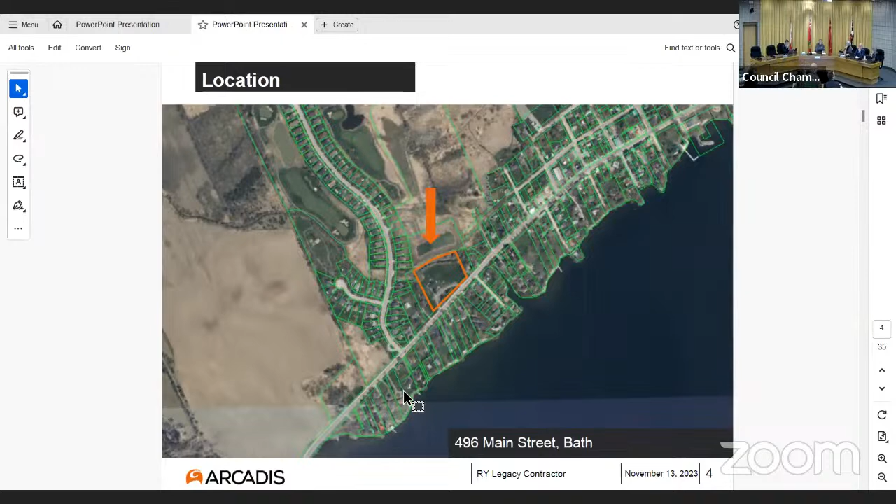This is the aerial imagery of the parcel we're referring to, 496 Main Street, Bath, in the Village of Bath. To the north is Bath Creek and Loyalist Golf and Country Club. To the east is the Village of Bath, various commercial uses, and low density residential uses. To the south are low density residential uses, Main Street, Bath, and further south is Lake Ontario. Immediately west is low density residential development along Country Club Lane and lands designated for aggregate.

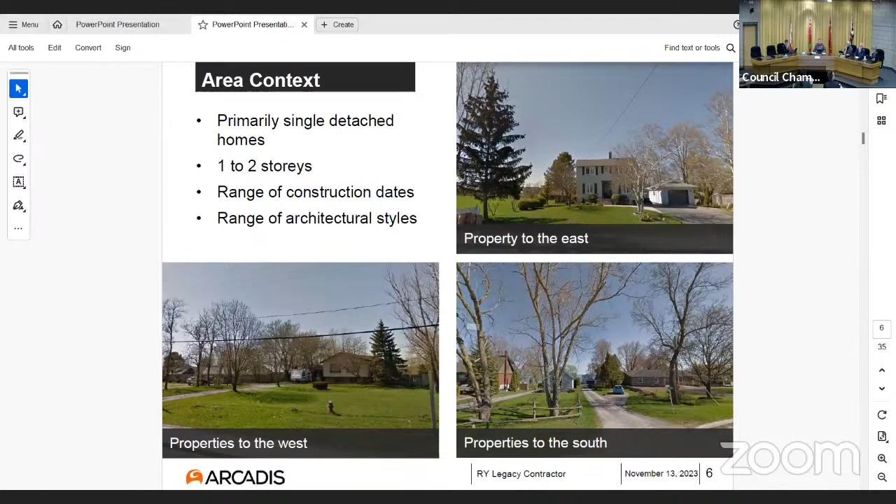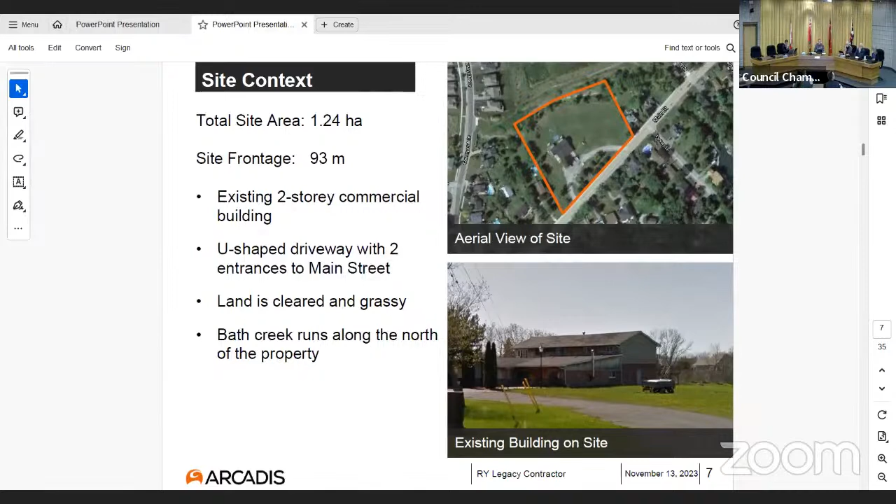So here's the proposal broken out into land use blocks: 10 residential blocks, blocks 1 to 9 for semi-detached residential uses, and block 10 for a single detached residential use. There's a central cul-de-sac, and then the lands adjacent to Bath Creek are proposed to be open space and environmental protection. Overall density...

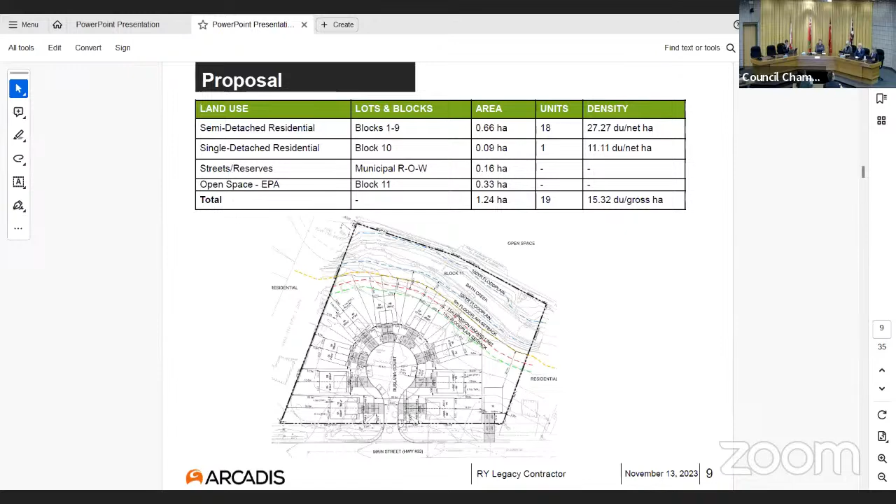I'll just jump in. So there's the picture of the cul-de-sac. Apologies, it's quite small when seen on this screen, but the semi-detached dwellings front around the central cul-de-sac, and then the single detached houses are to the east.

So in 2021, we undertook the public open house and statutory public meeting. We heard comments related to concerns with compatibility and scale, concerns with potential traffic impacts, concerns with servicing availability, concerns about open space, and concerns with stormwater management.

So based on this, we've been working to update the plan. The key updates include changing the townhouse block to a single detached block. That block to the east was originally proposed to be a townhouse dwelling with 4 units. It's been reduced to a single detached block to help with the transition from primarily single detached in the Village of Bath to the semi-detached along the cul-de-sac.

We've increased the length of driveways to accommodate more parking. That was a concern we heard from members of the public, so we increased the length of driveways so each driveway can accommodate 4 cars as well as 2-car parking available in the garages. We've undertaken updated engineering studies to address township comments from the technical review and undertook a compatibility study to address proximity to the quarry.

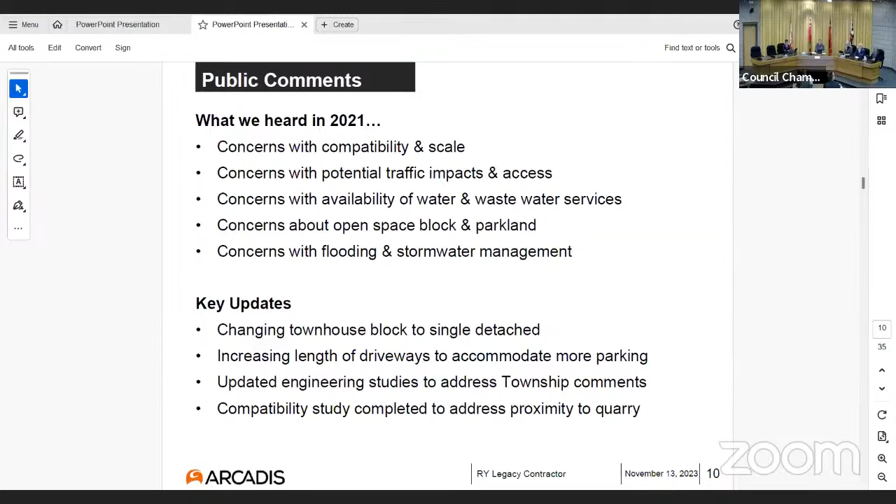So again, here's the proposed plan of subdivision, and we'll go through some of the design considerations. We're looking to provide a mix of housing types in Bath, so semi-detached as well as single detached, maintaining a 6-meter floodplain setback for the property lines and a 15-meter floodplain setback for the buildings.

We're looking to minimize the number of entrances to Main Street, so we didn't increase the number of entrances. There's still 2 proposed, one with the cul-de-sac and one for the single detached driveway. And again, increasing the number of parking spaces to over 2 per unit, just to help address concerns related to possible visitor parking.

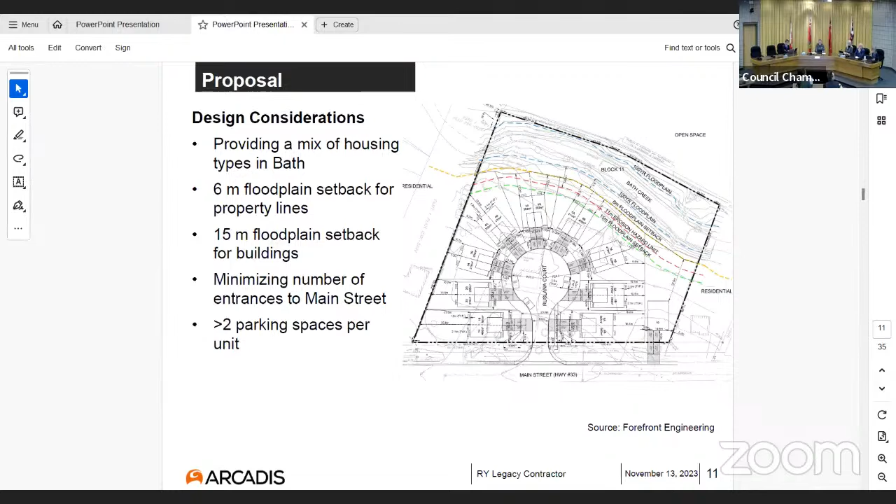So the proposal is for the subdivision to be serviced by municipal water and sanitary services. Loyalist has confirmed there is sufficient infill capacity, and the servicing report provided with the application updates and addresses any local concerns. Block 11, the lands associated with Bath Creek, is proposed to be environmental protection, and the owner will be providing cash in lieu of parkland, as Block 11 was determined not to be suitable for park and open space.

Access is via a public cul-de-sac connecting to Main Street. Each single detached dwelling and semi-detached dwellings have individual driveways. The semis have individual driveways connecting to the cul-de-sac, but centralized to one street connecting to Main Street. And there are sidewalk connections that connect to the existing sidewalk network on Main Street.

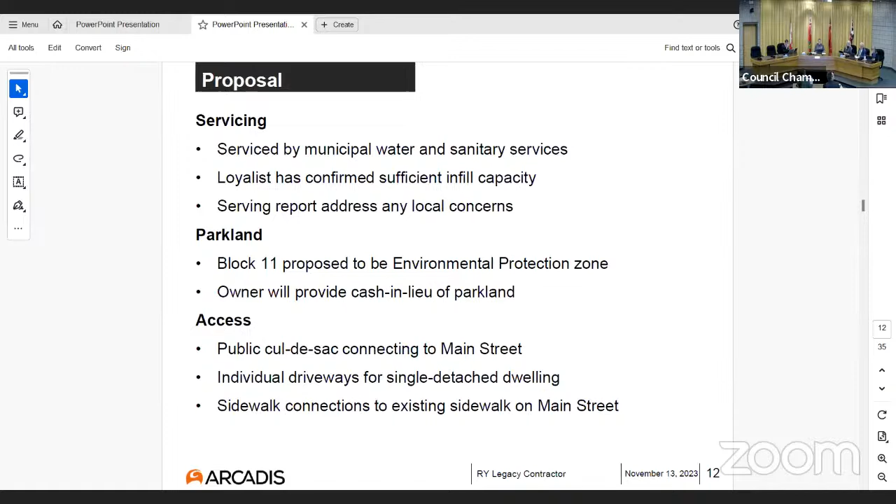We will note that the proposed dwellings are intended to be market housing. There is desirability to be attractive to seniors; however, ultimately it will be market housing available to anybody. There will be a mix of slab on grade as well as basements, depending on the topography of each individual lot after final grading.

And we did hear some comments and concerns related to short-term rentals in the development, and would just like to note that the dwellings in this development will be subject to the same regulations as any dwelling in the township.

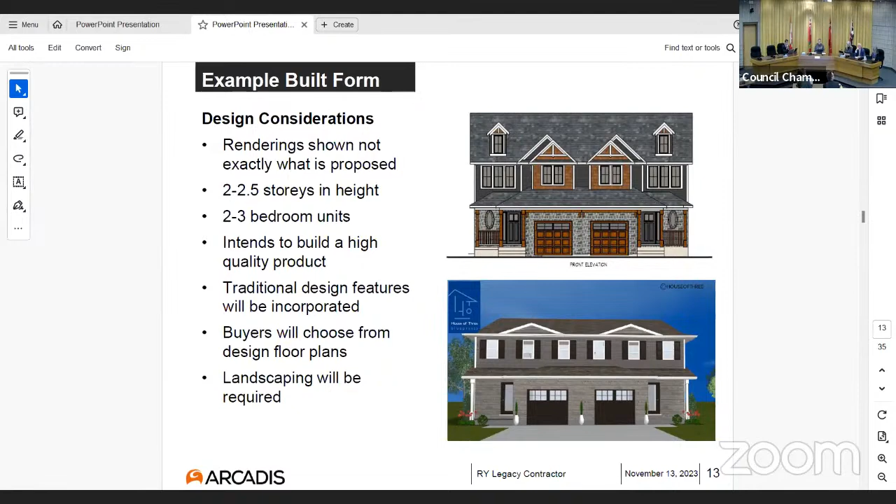Moving into the planning policy, overall the proposal is consistent with the intent of the 2020 Provincial Policy Statement, as it redevelops an underutilized site in an area intended for urban development. It's within the urban growth boundary, efficiently uses land and resources, and does not result in the uneconomic extension of services. It's on a serviced parcel, adjacent to residential uses and is itself a residential use, therefore compatible with surrounding uses. No public health and safety issues are anticipated, as there are sufficient setbacks from Bath Creek and adequate separation from the Bath Quarry.

Moving on to the township's official plan, the property is currently designated commercial, as shown by the red arrow pointing to the red hatch in the image. We are proposing a low density residential designation, for residential property less than 31 units per hectare. The semi-detached dwelling block has an overall density of 27.27 units per hectare, and the single detached block has a density of 11.11 dwelling units per hectare.

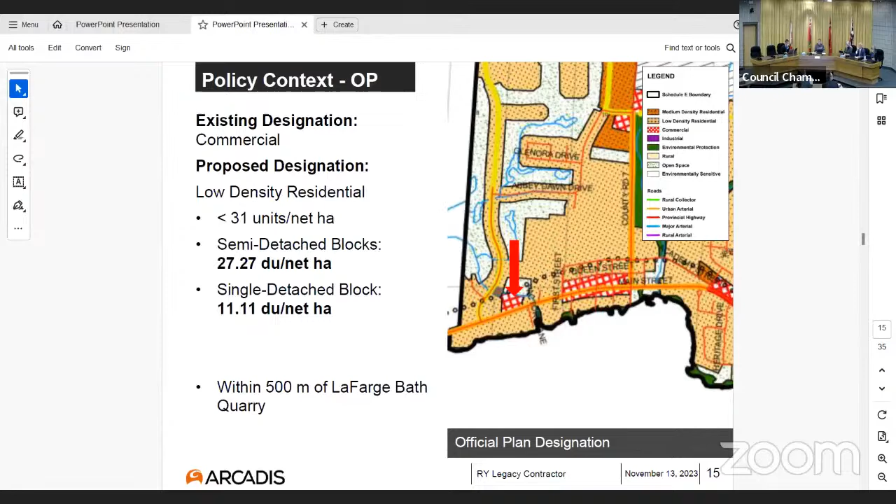So overall, given the change from commercial to residential, it's our opinion that the proposed residential designation is more compatible in the area compared to the commercial. The subject property is in a settlement area and was within walking distance of existing parkland, community facilities, and commercial uses in the village of Bath. Again, the proposed residential use is more compatible with adjacent properties compared to a commercial use.

It will meet the functional needs of site users as parking and amenity space are provided on the site, consistent with township standards. The proposed development will help the township achieve their residential intensification targets in the settlement area of Bath. It also complies with the land division policies, and the engineering studies submitted demonstrate that the development of the subject lands is orderly and logical with respect to servicing and access.

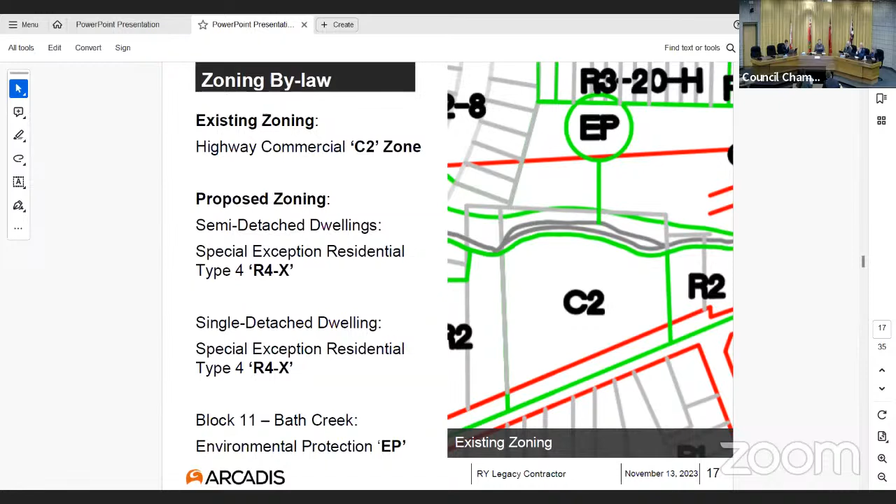Moving on to zoning, the property is currently within the highway commercial zone, and we're proposing a site-specific R4 residential for the entire property, with a separate special exception for the semi-detached and a separate special exception for the single detached. Block 11, the lands associated with Bath Creek, will be placed in an environmental protection zone.

Here's the proposed zoning schedule. The property will all be in the site-specific R4X zone with the Bath Creek lands in the EP zone. Here's a summary of the requested relief. Overall, the requested amendments are proposed in order to reflect the characteristics of the site as well as modern construction standards.

We're looking to reduce lot areas to 541 square meters, exclusively for block 8, with a 15.2 meter minimum lot frontage. This is to accommodate the pie-shaped lot configuration around the cul-de-sac.

A 6-meter front yard is proposed, but we'll note that it does appear longer just based off of the area associated with the cul-de-sac that is technically still within the public right-of-way.

A 2.4-meter exterior side yard is proposed for blocks 1 and 9 fronting onto Main Street, Bath. This will help keep a consistent street wall along that village Main Street, and again we intend to treat the site with more traditional cladding and architecture.

A 1.4-meter interior side yard is proposed for the semi-detached dwellings. This is consistent with modern standards and seen in lots of subdivisions across the area and across Ontario.

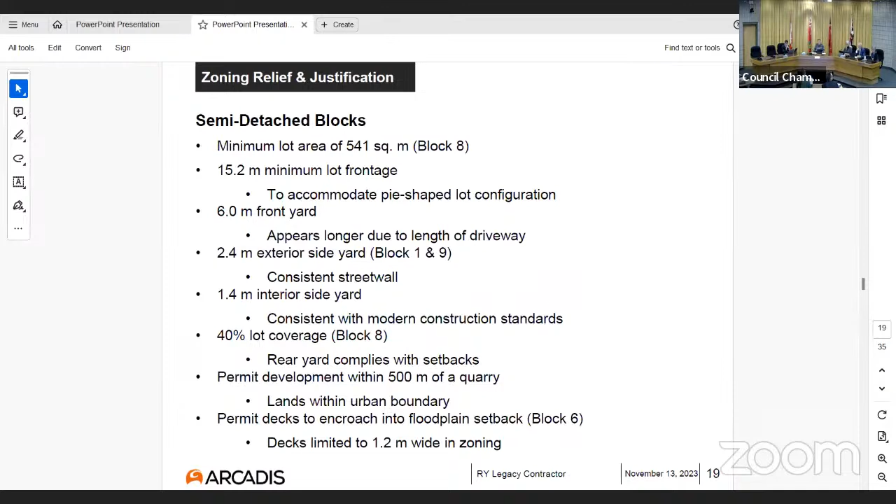For the single detached block development, again we need to permit development within 500 meters of the quarry. The lands are within the urban boundary, so this is an appropriate use of land. There are existing residential uses closer to the quarry than what's proposed.

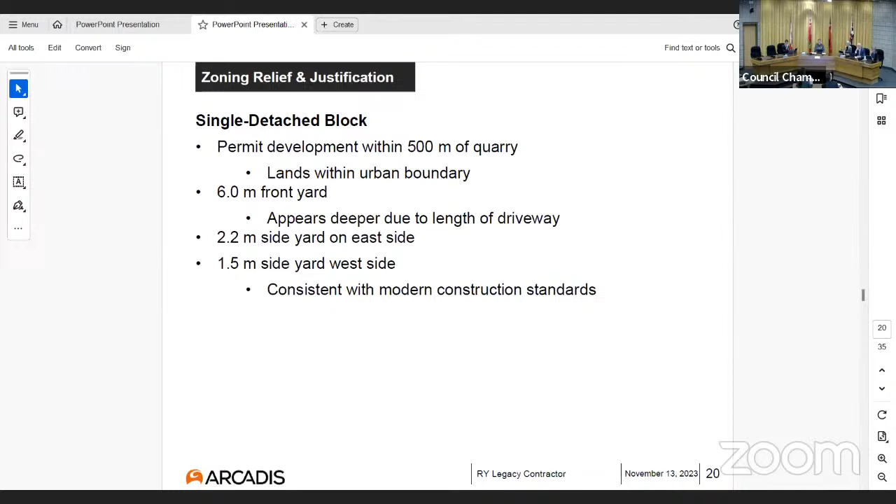6-meter front yards are proposed, which again will appear deeper due to the length of the driveways. A 2.2-meter side yard on the east side is proposed, which is the side that shares with the existing single detached to the east, and a 1.5-meter side yard to the west, which will share with the townhouses, again consistent with modern construction standards. So no negative impacts are anticipated.

To summarize, it's my professional planning opinion that the requested amendments are appropriate as they're consistent with the provincial policy statement, conform to the official plan policies, and will be compatible with surrounding uses. Overall, the proposed development represents good planning and is in the public interest. Thank you. Here's a picture of the development again, and we welcome all questions from council or public.

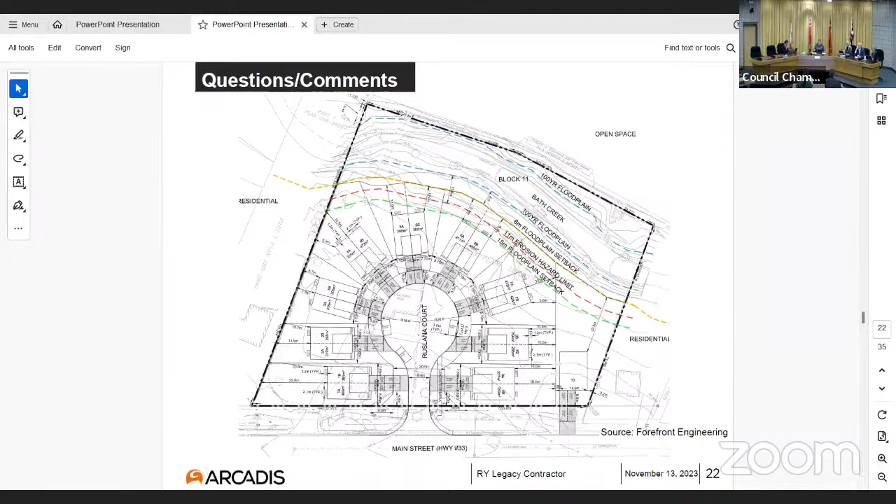Council, any questions for the consultants? Councilor Pratt: Thank you, through your worship. Just a couple of quick ones. On block 11 there, if you can put that map in front of you—6A there, where it's 6 meters from the 100-year floodplain, sorry.

Can you give me an idea from the property line to the back of the property, what's the distance? Just give me a ballpark. Nine meters. From the back of the proposed dwelling to the property line is nine meters.

And then it's another 6 meters to the floodplain. So from the back of the property line to the other side, the other hundred foot which would be deeded property to the township, how far back is that? I guess I'm not asking it very clearly. I don't see a designation to give you an idea what the buffer zone is there.

Are we talking from the 100-year floodplain to the back of the property line, or the total width? So from the property line of the proposed housing unit to the farthest back that you're going to deed to the township, what's the distance? You have 6 meters to the floodplain. Now I'm wondering, it's at least 25 meters, but that's fine. That's a good enough ballpark.

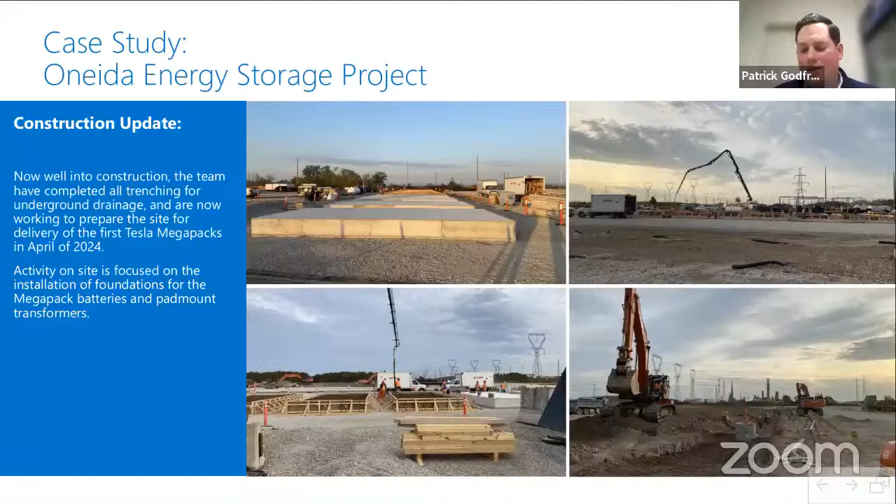With the IESO LT1 procurement, we're ramping up to a bid deadline of December 12th, where the IESO is targeting 1,600 megawatts of storage, and they're looking to procure across the province at this point. They are requiring as a mandatory item municipal support for these projects. As I'm sure some of you are aware, there are many groups in the province conducting public consultation and presenting to council to garner support for these projects.

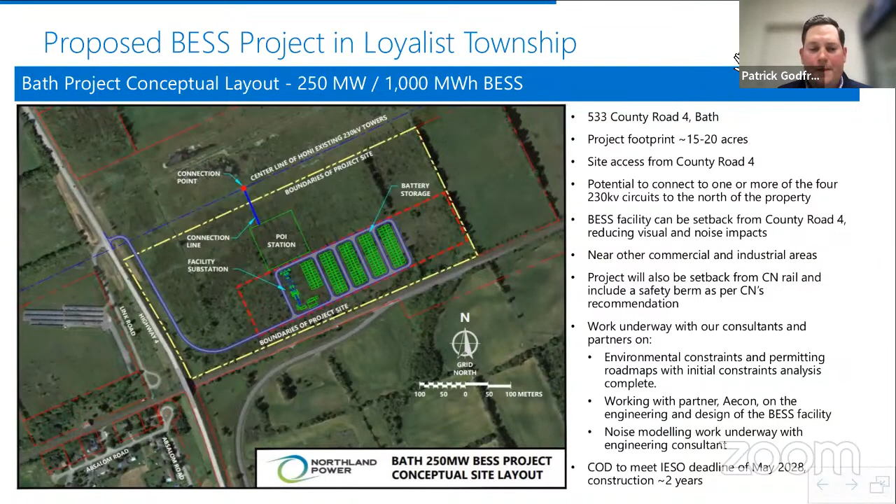Safety comes up quite a bit in our discussions with residents and local stakeholders around fire safety and risk. So we develop rigorous emergency response plans and fire management plans, like we have at our Oneida project that I mentioned earlier, with quite a bit of detailed coordination with the local fire department and local stakeholders.

The battery containers and the technology that will come into the marketplace once this procurement rolls around is cutting edge. Top tier manufacturers have spent a lot of time on fire safety, and these systems are contained — contained within the modules within the storage container, and also contained at the storage container itself.

So it is unlikely that a fire would spread to a local adjacent container or further, because there are preventative measures even before a fire takes place to ensure it does not happen, but also so that if it were to occur, it can be easily managed. There will be more coordination with the fire chief around this — we've spoken initially a few times, but it's a topic we like to take extra precaution over.